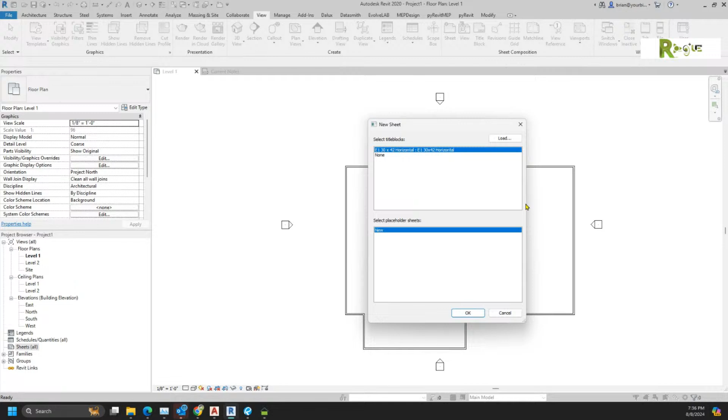And the neat thing about it, we can have different paper sizes, but I'm actually going to want to teach you how to make a border, because you have to know how to make a border. It's this very simple family. That's something that we're going to get into real quick on this step 2. I think I wrote in the email that at the end of September we're going to be going into a step 2. The idea is that level 1 that I just drew of that building, then the roof and the site plan, at an 1/8 inch scale, we're going to find it just fits on the sheet.

However, if we've got to do that at a 1/4 inch scale, which typically for coordination drawings is exactly what you have to do, you see it just barely fits on that border. Now, we would find out that it's got this little title bar that comes in with it, and you'll notice that this level 1 corresponds to the name here, which means, once again, if I name it here, now it gives you this question.

Eric, you want to speak to that? Anybody want to tell her what that's saying to you? There's going to be several times where Revit's going to ask you a question. What I don't want you to be is so scared to answer incorrectly that you don't move forward beyond that point, because in the early days, that's where you'll get. Try to read it, and what it's saying is it's going to rename the levels. Okay? So that means it's also probably going to rename the ceiling plan as well.

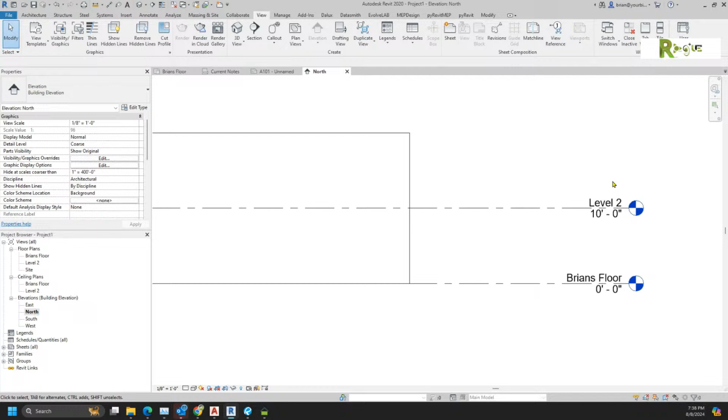Let's see if that's the case. We say yes, and you'll see now I have a Brian's floor plan and a Brian's floor ceiling plan. But what it was actually telling me was now I have a level line that's named Brian's floor. Okay, so that's what that question was asking. Now, typically, we're going to get these levels all in correctly, and we don't want to do that. But what I was trying to show you is it also fixed the name of that view. So now I've got a drawing, and at that scale, everything works good.

Now, what Eric was worried about was the dependent view. So when you start getting something that's large, like the size of the casino, when we get a building like that and we go back to that sheet, now we're stuck with a predicament. How do we get that to fit on that sheet? We got to have a match line. You've seen drawings enough. Are you familiar with match lines? Which basically means I'm going to have an east wing and a west wing, or area A, area B. There's lots of different ways that you can do it.

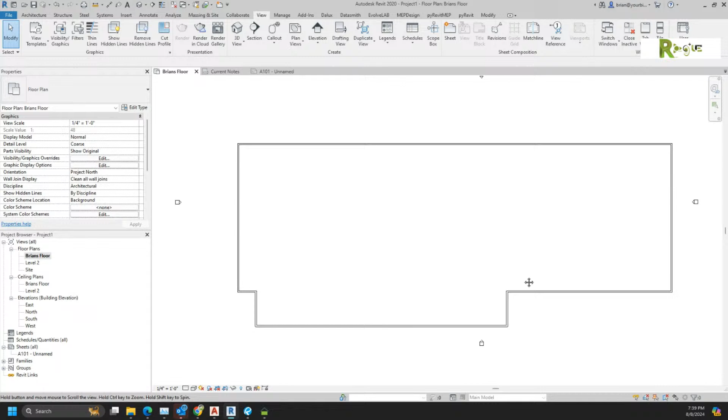But what your objective is, and it's a little bit tricky, because right now, down here my cropping is not set to be on. This one here says crop view, and this one here says show crop region. So I can't even see it, but there is actually a crop region there. Actually, there's not, but let's pretend there is. And that's the crop region. So I don't have a big enough piece of paper to fit this thing on. So that's where the dependent views come in. So this is where we duplicate as a dependent.

You're really going to get this driven home when we give you a model and we tell you we need to set this up. So now you'll see that even though Brian's floor looks identical to Brian's floor dependent one, what I typically do, what I've learned, and just to show Eric, is I found that now if I put Brian's dependent on here, I can pull in this view.

Now I double clicked in that view to activate it. See, I could pull all these things nice and tight, these elevation markers. If they're not that tight, they're not going to show on the drawing or on the sheet. So that's why I'm bringing them in closer.

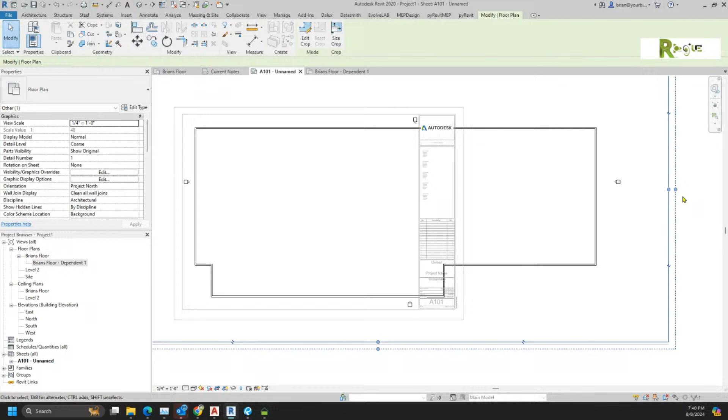But the real thing I'm trying to do here is this crop boundary. You'll notice it looks a little different when you highlight it. There's actually two lines. The second one is an annotation. If you don't like that, it's right down here, called annotation crop. You can turn that off. You'll probably end up keeping it on because it's important.

That way the tags go on the right view. But what we can do is pull that crop boundary down to where the building is. I could take my view title, drag it up into place, and you're going to get to do all these clicks and drags because I don't want to see things. I want to see things as PDFs.

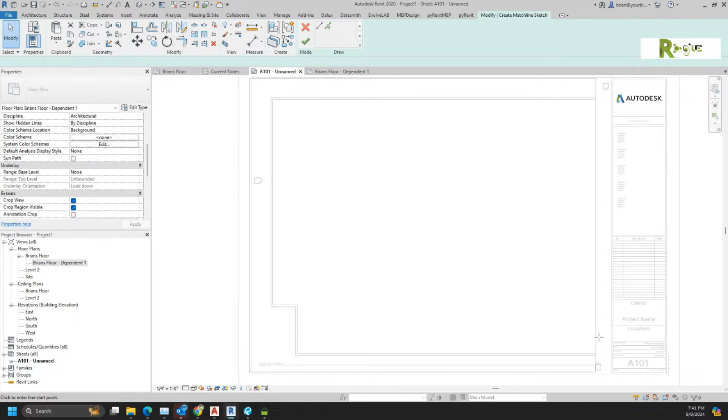Now we can make that a little bit better, because one of the things that happens with a dependent view is the dependent view works very good with a match line. And then as well, we're going to show you another one that's going to be called a reference view.

So what happens now is if I go back to Brian's floor, do you see how this crop boundary is here? That's the area I just drew. The match line is in here. So what happens is I can work on this floor plan. This other crop boundary out here, that's actually never used.

Because what we do is we don't place this big one on the sheet. What we're trying to do is create these guys. So the next step I typically do is duplicate that dependent as a dependent. Now you would think that would be making a grandfather, a mother, and a child, but what it actually does is just create another child of that parent view.

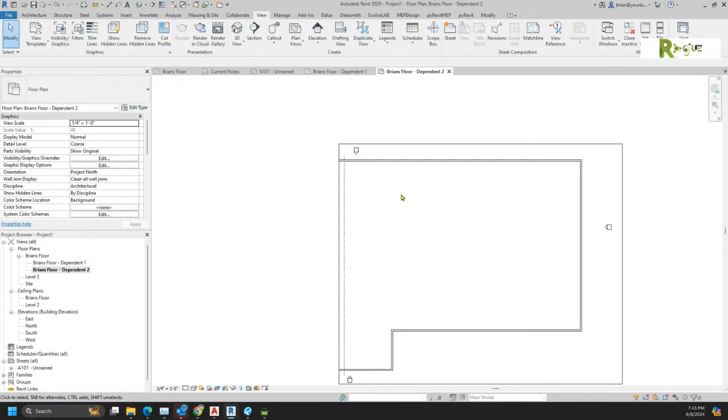So now what you'd find is if I took that crop boundary and moved it over - and I don't want to move it beyond that match line. You see that match line? I want that match line to appear in both views. And the question is, does that fit on two sheets? Sure enough, it does.

So what happens is now my first floor, we would end up taking that original view out. We'd put the Brian dependent one. You'll see how it almost comes close to fitting on the sheet. And what we'd want to do is name this guy. This time you're going to see that where I'm going to name it, it's actually a little bit easier for me.

So I'll go here and say east - or I'm sorry, this would be the west side. And if you sit there and say, well, I don't know, should I make it east or west? My recommendation: go into this view, look at what this is named. This guy is actually named - where's he named? Right there, west. View name west, okay?

So the idea is some people will try to fight it, they'll say, oh, well, that's not how we do it, we think of that as the east. And you don't want to fight what Revit does.

So part of what I'm trying not to fight is, do you see how things are spelled? How when Revit creates level, it creates it as a capital L, e-v-e-l. And you'll end up finding that's the case. So that's where some people say you should do it in all caps. Some people get lazy and let it all go undercase. But my recommendation is you should really get used to spelling things in what I call title case - capitalize the first letter and the rest of the letters are lowercase.

But like I said, that's only because I learned why fight what Revit does naturally. Notice how when it created this sheet, it created it as unnamed. Now, what we've just done is we've just named that guy West.

And normally what I do - now granted, most architects, people, engineers, they'd want you to put something like floor plan or level or something like that - but notice how that renamed it over here. So what I would then do is I normally take that view name, and if it's the only view on the sheet, I'm going to come over here to the sheet name and paste that in, and it would be the same.

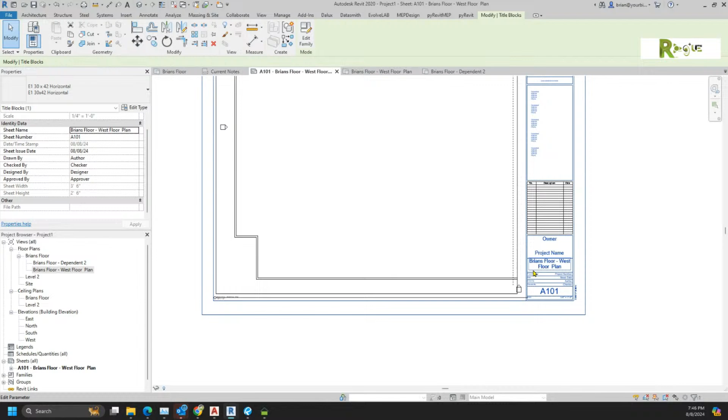Whatever that main view is and what the floor plan is. Now, as Eric and I were talking, it's really a challenge because you don't need to just learn Revit, you need to learn drawing standards.

So can anyone tell me why it's a bad idea for me to take and make my whole view fill this sheet? Eric, you want to help on that one at all? I mean, are you saying because the typical standards are to do 1/8 inch, 1/4 inch, whatever, and keep it that way? You don't want to use 3/32nds? Is that what you're saying?

No, what I'm saying is we should really have a strip here. Oh yeah, here. You got general notes, keynotes, all kinds of stuff. Legend, yes, that's exactly right. We should keep an area where we can put the legend and the key plan and the symbols and maybe a schedule. You want to leave a little bit of room.

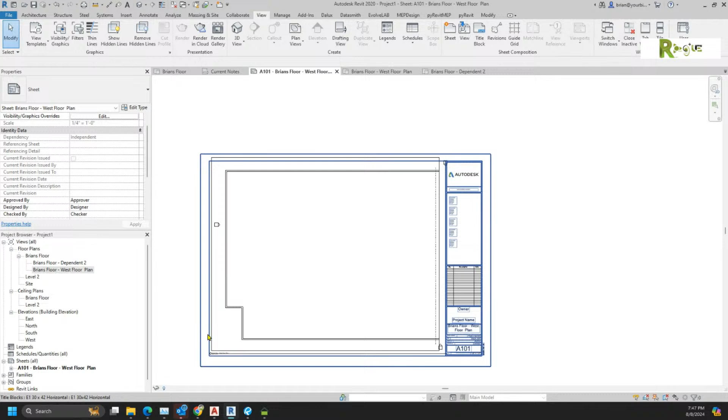It's a common mistake. That's also not a great title block, I don't think. Without a doubt. But with what we cover today, Ginger's going to have her a professional title block tomorrow. Okay? Because it's only going to take that long. Because that's where I wanted to show you. Let me finish the sheet up.

So the next thing I would do, now here's the neat part. If I come in here and I name this A101, and this is where it works better if it's area A as opposed to east and west. See, if I was to say, oh, you know what would have been better? Instead of west floor plan, I would say area A plan.

Now, if I did that, it's really a good idea for me to take that same information, and notice this time I'm going to put it over here just so I don't have to zoom out. I'm going to be putting it in there, and then I'm going to be putting it in here. Now, somebody tell me why I say it's better to go area A, area B, as opposed to east and west.

Because you're not usually looking at two different things. Oh, you're talking about that coding on the sheet. I got you. That's why. Usually you're looking at more than two segments anyways. Yes. Well, but yes, that helps.

Depending on the building. But the thing I was thinking of is what happens, Ginger, is now we've got one sheet. See it down here? Sheet name, what it is. When I go and make my next sheet, like I said, instead of me going create sheet, I have to create sheet so many times. I've added it to the toolbar up here. I say, okay.

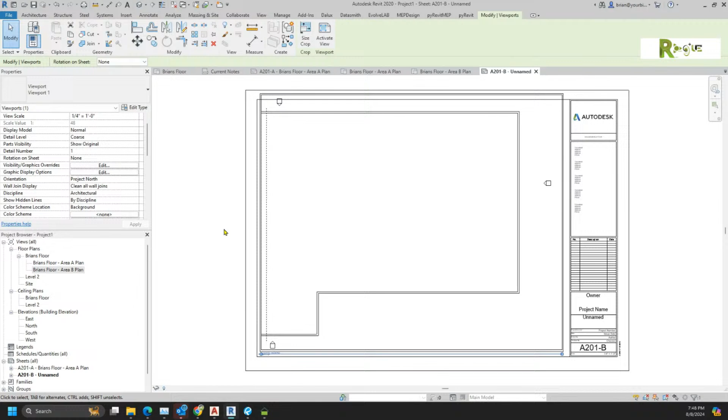Now I drag this guy in. Okay. Notice that he's already named 201B. Okay. And if I name this 201X, watch what's going to happen.

If I say make a new sheet, what do you think is going to happen? It's going to be 201Y. And if I made this sheet 808, what's going to happen when I make a new sheet? It's going to be 809.

And you want to leverage that to make that work, because you see how we got these sheets here? You do understand I created over 1,400 sheets for the project that we're working on. So everything you can do to make this thing go faster is going to be very important. And that's what you're going to do. You're going to try to decide how to break up a project, how to put it on sheets.

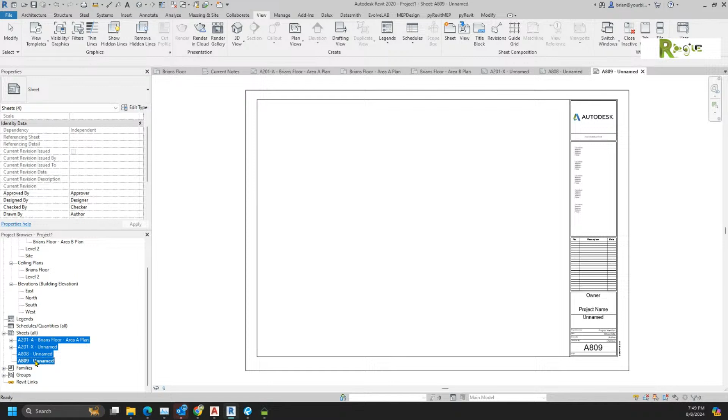And what we were talking about a second ago, I could go back to any one of those floor plans. Oh, I'm sorry. That was it, wasn't it? That's the actual floor plan. This was the one where it was placed on. What we would do is you can double click on the border, or you can say edit family.

Ginger, I need you to unmute and I need you to remind me what the heck you were taught about creating families. What commands should be in this create family? Do you remember the ones you would expect to see? Commands. What do you mean by commands?

Remember, we could do an extrusion, right? What else could we do? Do you remember the names of the ones that we went over when we created that diffuser? We can do it a revolve. We can do a sweep. So my question then quickly becomes, where the hell is extrusions? I don't have those. And the reason being is we taught you how to build a 3D object family.

This type of family is a 2D family. Even people like Mike, even myself, quite frankly, struggle with all the different kinds of families there are.

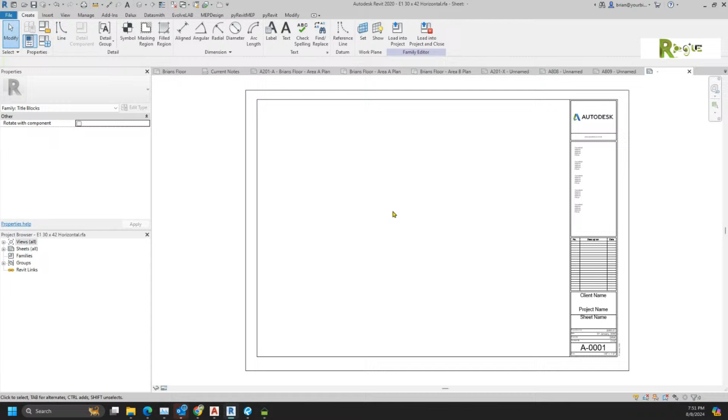What I want you to not be afraid of is a title block family - it's not that complex. It does not have the create extrusions. This is an object where you can only draw lines. You'll notice I can't even put in detail components - I can only do these couple little things. So there's not a lot you can do.

The big thing I want you to realize - Eric was saying you're going to have this a lot smaller so we can make room for the rest of our information. So I usually would be looking at taking about that much information.

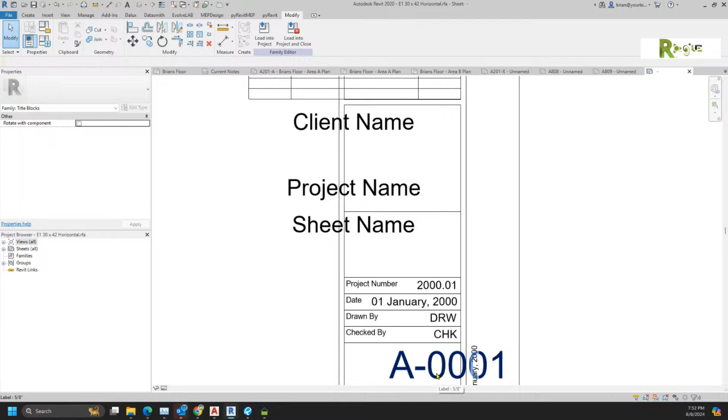And I'm serious, I want you to try to go make a border. Go recreate that border and make it real tight. A lot of times people will turn that on its side, feel free to do that. I just want you to realize that one of the things you get to do on a job, when you're lucky enough to be high enough up that you get to create the borders, you can be creative.

I'm not even going to use this stuff here. I'm going to take this logo, get rid of it. Maybe I decide, wouldn't it be neat if I could create a logo? Well, I could...

Draw myself a shape - and we're going to test you a little bit. Do you remember what I said about these sketch shapes? If I draw another circle inside there, what is that other circle going to do? Create a hole. And if I create another one, it would fill that one in.

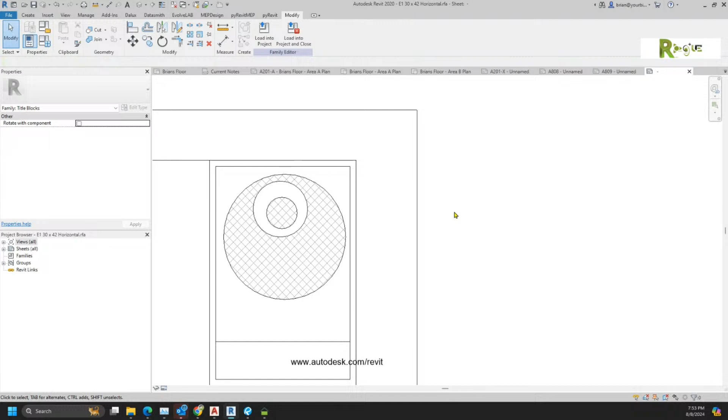So I want you to get a little bit creative. Maybe even go so far as this - if I can draw one filled region, couldn't I draw two and have a nice triangle? And maybe that triangle - I say oh, I only got one type of filled region - well, maybe I'll just create a new one.

Watch where I'm going here. I might say something like gray. And then I could take this guy and make him be a solid pattern of a gray color. And that's it.

I'd like you to be a little bit creative with it. What I want you to understand is the only thing that's typically in the border is a little bit of text. And with this text, we don't like the size of it, so the way most people would have you do it is, oh look, they got a smaller, they got a 3/16 - so I could actually just take all these guys and make them go to a 3/16.

Now do you see this box right here? That box is where it's going to wrap. So what I want to do is actually move all this stuff over so it's about centered in there. And when I want to pick each one of these guys, I want them to go so that they're just inside that box.

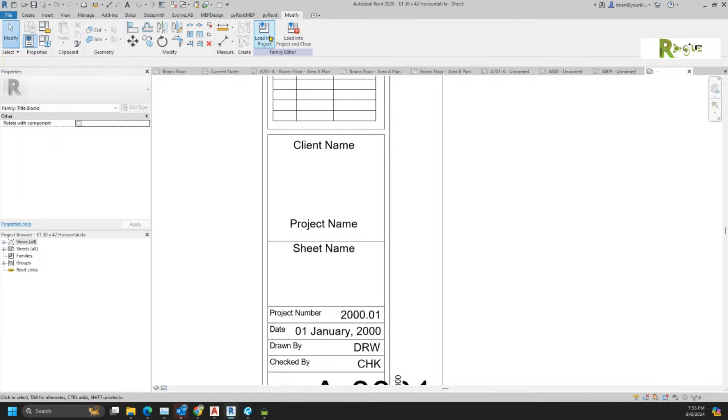And then what will happen when I load this back into the project, you'll see my border got much smaller. My names - remember that name right there where it says unnamed? That actually comes from here.

Control C, Control V. Well, notice I've got a problem - I didn't do anything about my sheet name. So if I go back to... that's always a lovely one. I think you closed it. No, I didn't - it's just a little dash, and there were too many of those across the top to see it. But good call.

Let's see, this one - why does it not have the box? It's a label. It's pretty weird, isn't it? I bet I know why. No, that isn't the why.

All right, these things that we're changing right now, Ginger, they're one of the two objects that you got to draw. You can put in text - whatever I write in here, like 'do not scale drawing' - that would be on every sheet. That's a piece of text.

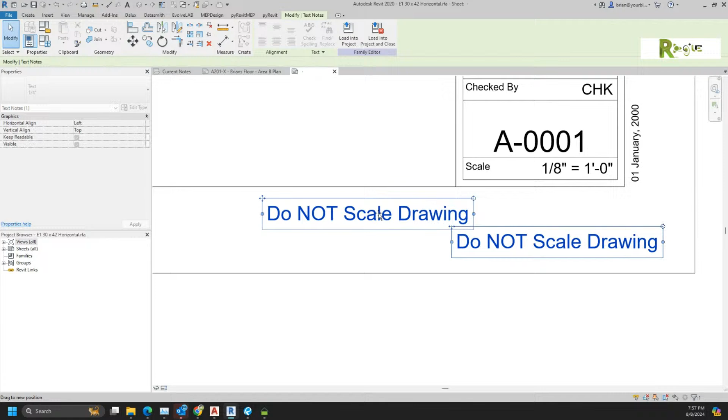As opposed to the other thing you can put in, which is a label, which we played with a little bit when we were making annotation tags. I'm not sure if you were there for that class or if you remember any of that - an annotation tag as well is a 2D family, so that's sort of why I wanted to reinforce what we'd already gone over. The other object you can put in is a label.

And a label goes in that you click on the screen, and then this window pops up, and then we can put a parameter in. Okay, so if I wanted to say the sheet number or one of these parameters, I could very easily put that in. Let's do exactly that. We're going to have it say the sheet number. So we have the sheet number twice. You simply put it in.

Now, if you wanted to put a bunch of information in there, you could put multiple parameters, or you could create new parameters. And you're not going to need to do that in the beginning. Now, that new one that I put in, you know why you don't see that box? Here's why. No, right there, I'll bet any money it's because that's transparent. I bet if you made that say opaque. No, son of a gun. This one has it. This one does not.

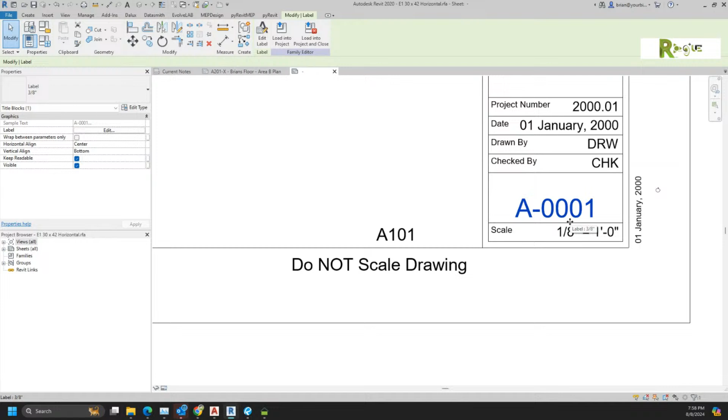This is one of those really weird things about a family. That's because that parameter has probably been around since Revit 1, and there's something a little bit weird about that one parameter, which is interesting. Could it be because of that sample value? No, that wouldn't be it either. I'm going to have to look into that one. I'll get back to you.

But the idea is you can either put in text or you can put in a tag. When we load this into our project, what we're going to see is now we got a good sheet number. And you'll see we were able to put that in there. And remember what we wrote down here. You'll notice when I go to the other sheet, this has an A, but it has the same do not scale drawings. So the only thing you really have to do to create a border is put in labels and text. That's it.

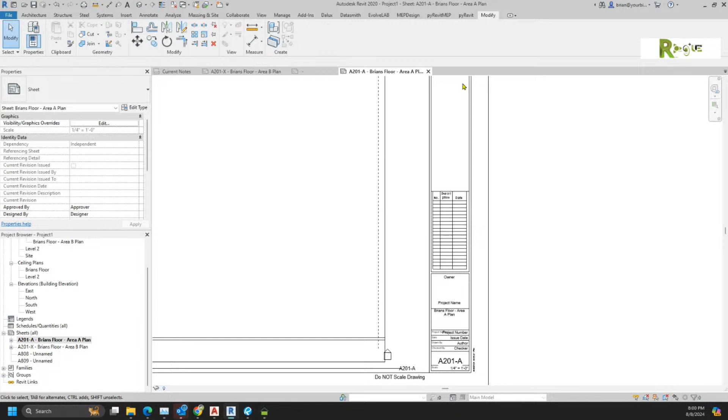It'd probably be a good idea for up here for this logo for you to even play with putting a century one in there. Sometimes they like to have some notes. Blah, blah, blah. Maybe you want the home and office number. Maybe you want the subcontractor. That's what typically goes in a border. You have some borders laying around. You could go check them out. Okay. Well, what we're trying to do is leave ourselves some room so that we can put some text on these sheets right here, some general notes, like we said, key plans, vicinity plans, that kind of thing.

So, dependent views. Input, Eric, Misty, Ginger, anyone? That's pretty much what I wanted to make sure was understood. Well, the way I think that's best to be understood is going to be for Ginger to lay out about a couple hundred sheets. And I guarantee you, when she gets to the last one, and same thing for Tyler, I think if you set somewhere between 50 to 100 sheets up, I think you'll have the hang of it. I'm pretty sure.

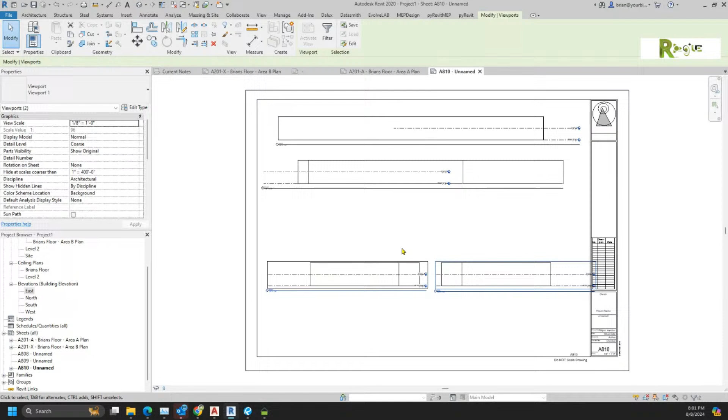Understand, the way we would look at it, Ginger, we would then be looking at setting up the sheets that are going to be the north view, the south view, the west view, and the east view. And see, I would personally probably try to jam both of these on. You notice I do a lot of nudging when I set this stuff up. Maybe I even want to do it at a little bit larger scale. But the idea is

now, since I've got enough experience, what I can then do is realize that I'm going to be putting a roof on this thing. That's why I gave myself a little bit more room. I'm going to go throw some doors and windows in there. I'm also going to be checking these levels out. So one of the things we can do, you're going to notice that I'm actually working in the sheet. So don't just think that we set these sheets up so we can communicate with other people. Actually, if you do a good job setting them up, you can actually do a fair amount of work.

So let's get realistic. There's never a 10-foot floor to floor. If you're building 10-foot floor to floor, that's like on the casino, or on the tower. That means there's no room to do anything. By the time you've got structure, you've got no room. So let's call that maybe 11. Actually, I'm going to go bigger than that. I'm going to go 14'8" because this is a big floor.

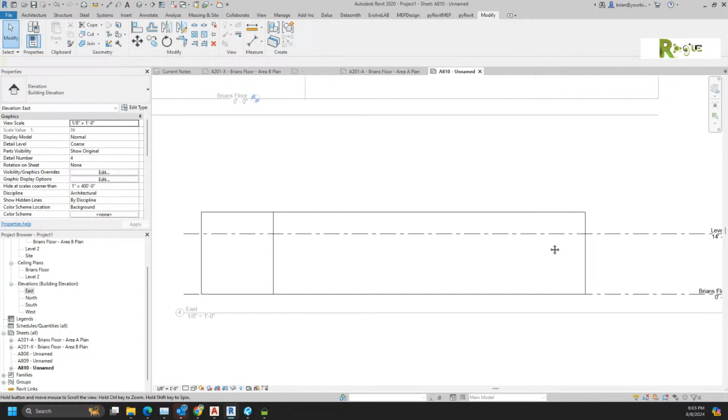Right? Notice how they all went to that 14'8" in all of my views. See, because that's how a level line works. It's affecting all of those. So another thing, if you've never enabled the crop on that view, if you've never turned the crop on, what you would find, can you see that little 3D? That's very important because of what that 3D means. I want to do this so you can see it in both views, which trust me is not going to be easy because I've got to get that little dot.

What you'd find is if you look at the other view over here, notice how it moved itself over. See that one over here? And on this side, I need to actually stretch it out a little bit more. And the reason being, do you see how that fixed it in both views at the same time? Because they were 3D level lines.

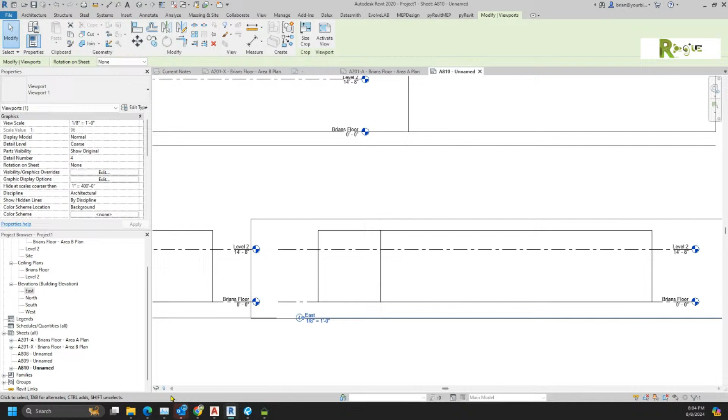Okay, now, what does the other look like? Well, if I was to go into this view and turn this cropping on, if I take this crop boundary and I strike that level line, what you're going to find is now when we pick on this level, it no longer says 3D. Oh, I need to cut just a little bit more. Hey, why would it not be doing that? Because the annotation crop's not on.

You think, Eric? I'm not sure. I'm pretty sure that's it. Now, when you go like this, let's see. I would have thought for sure when I cropped this view, yeah, it's not affecting those. I don't know why that one is. I would have expected that. Another one I've got to do a little bit of research on. The idea is if we turn that to a 2D line, what normally happens is that crop boundary.

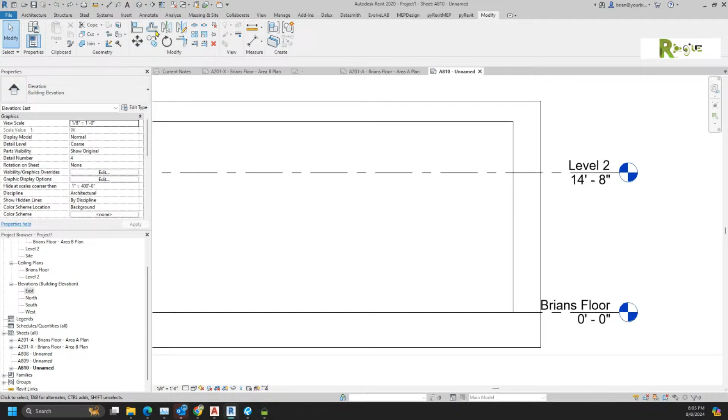Oh, I know why. I'm not too smart. Let's go back to there. Is it 2D or 3D? No, no, levels? Nope. Think about it, because once I started thinking about it, that crop is not enabled. So if we looked at the view, you would actually see it doesn't say crop the view. So I could either click it here, crop the view, or here. When I turn crop the view on, now those grid lines, you see how they now say 2D instead of 3D? I always have that crop on all the time, so I didn't know.

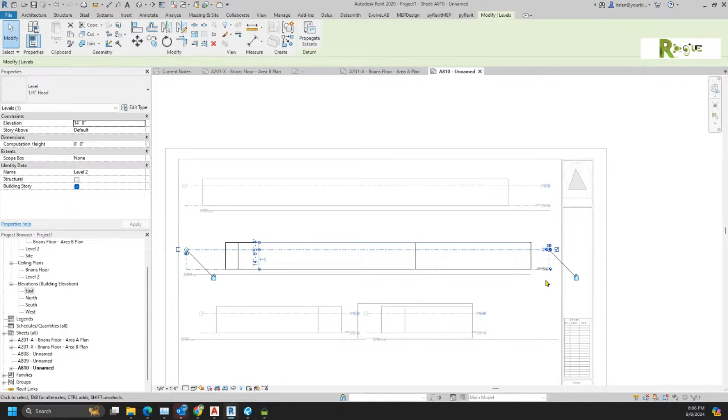But the gist of it is, in this situation here, when we're early in the project, if you're picking that 2D, you're not doing the same thing as this, which is in the 3D. Watch my top view when I get out to here. Do you notice how the level lines came out exactly the same? So when we're first setting up a job, you really want to do that to the 3D tags.

One of the things you can do then, let's say you've already cropped your stuff, but now you want to move that level line a little bit more. What's a good idea is to turn your cropping off, grab the 3D grip, and make that adjustment. You with me? Now it just made it to all sections and all your sheets that are related to that direction.

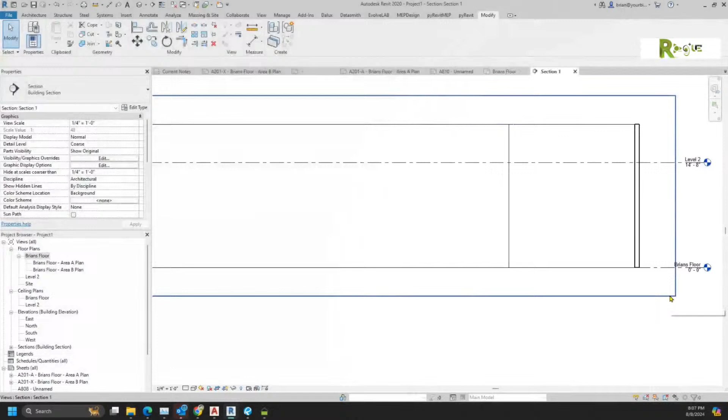And the way that's working, Ginger, if this is all true, what I'm saying is now, if we were to come into Brian's floor plan and draw a section across this building, you would actually see that those level lines should be working pretty doggone good. And if you're using the blue tag and the names on this side, I'll be honest, generally it's a good idea to edit that family right there.

Now, remember when I told you to edit the border family? It wasn't really that big of a challenge because you just picked on the family and said, oh, Brian, I can do that. I can pick on the family and come up here, and where the hell is edit family at? Okay. And that's going to be a real condition. What I'm trying to show you is this is when you have to look to the next deeper, I don't want to say level because it's a level line, but the next deeper place, which is here, edit type.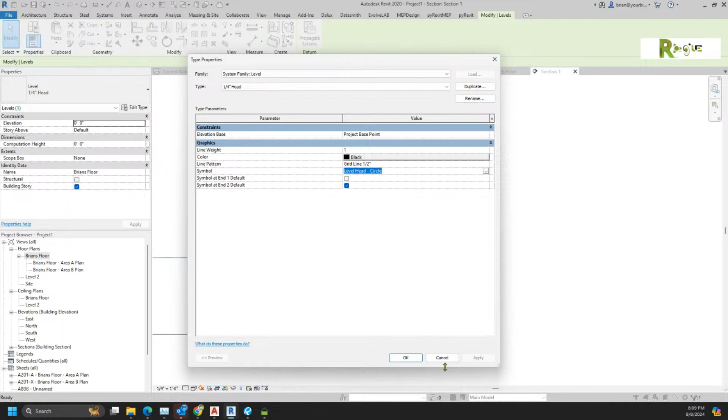Okay. And what happens is we can see this is a 1/4 inch head. And what we're actually doing is a level head named circle. So if I took this information right here, Eric and I and Misty, we already know where to go for it.

But if you were to come over here and say search and paste that in, what you would find is it's gone down all the way to the families, below the views, below the sheets, down to families, opened up annotation symbols, and it says right here's your level head circle. So if I wanted to switch that, I would come to here and say edit.

And now I'm in a family, and this family's a little bit different than a tag, a little bit different than a border, but they're from the same grouping. In other words, it's a 2D. Notice how I can draw the same kinds of things as in the border. Now, what I typically do is I take both of those and I go make them left, and then I nudge those over to the other side.

And then because I'm just really a nitpicky person, whenever I'm working with other people's stuff or from the template file, I always go and change my leader border offset to 1/64th. Okay. And what you're going to see is that annoying big box that's over them, it's going to make it much more reasonable. Okay. Still gives them a little bit of overlap, but before you would find it's very hard to pick.

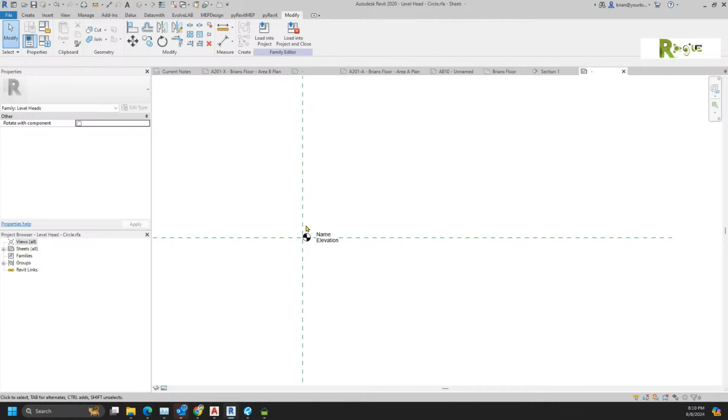Now, I will tell you, when you go into these families, it's a really good idea to do a VV, come to the annotation, and turn your reference planes on. Okay? Because otherwise, it's hard to understand where it's putting that information in from. This is where it's coming in from. So if I now load this into the project, you would see that now Brians Floor would be on the other side.

And then what a person typically says to me is, well, Brian, can't you draw a line out there? And I can. I don't think you're going to have any other line types, so I'll just let it be that one line type. So I'm not going too deep into this. Now, see how it's sort of getting hidden by the names? And that's what I want you to understand.

This is where Revit comes in. Notice how quickly I just keep revising what I want till I get it to where I want it to be. And what I'm having here as a problem is this thing called opaque. When I set that to transparent,

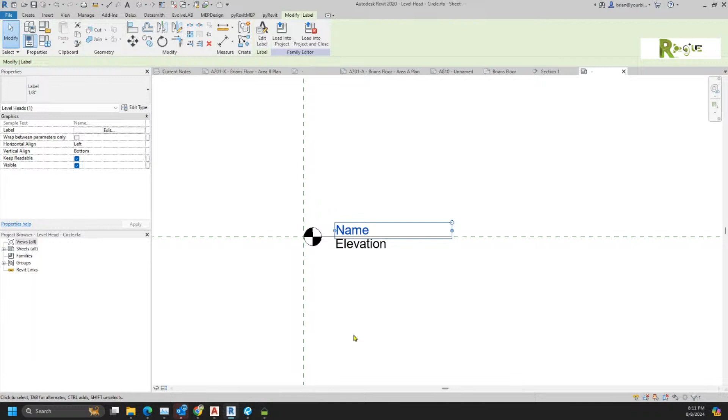And as Eric told you, in some companies, sort of like your company, they say, oh, Ginger's not smart enough to make those families. We're not even going to let her do that stuff. That's not the way I think. Okay. My recommendation is you should be able to do everything, but depending where you work, at Eric's company, they were divided into 3 different groups. One of them was the ones who did the families. One did probably sheets and text. Dimensioning, just dimensioning. Who did the sheets? It was sheets were dimensioning and annotation, and then there was a family creation team, and then there were the modelers, which did the coordination.

And trust me, if you had to spend 1 month or 2 or a year doing just sheets and annotation, you wouldn't make it. It sucks the life out of you. I would imagine it would.

So now what happens is I'd really just be working in here. This is like trying to take those fundamental skills that I gave you and just sort of amp them up. So I'm going to go ahead and close all other views. I'm going to close these families. That was the border that I played with. This is the level line head. I could now go back to drawing my building, which most people wouldn't think. Now I'll show you why there's a little bit of a backward step here.

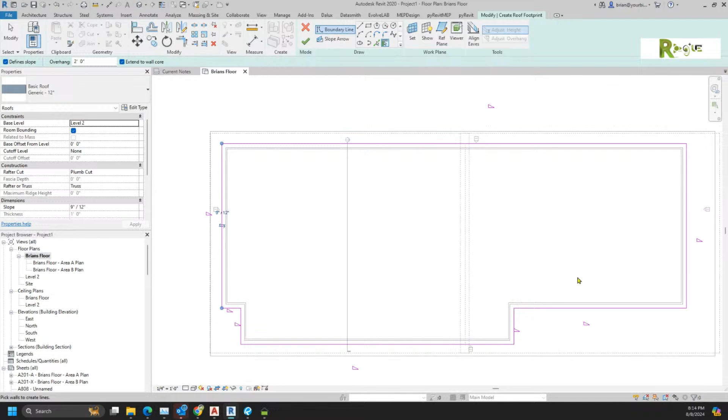So maybe the next thing that I'm going to do is put in a roof, and I'm going to go ahead and say define slope. I'm going to put a 2-foot overhang on it from the core. I'm going to highlight over top. Do you see how it's picking that one line? You got to start playing with tab. So I tab, and it's going to put that whole roof in. And now I could finish.

And what you would see is if I went down to my elevations, I put my elevations on one of these. Oh, I did. Right there it is. So I could take these 2 views and delete them. I could go to this view, and you see why I was trying to give myself a little more space, right?

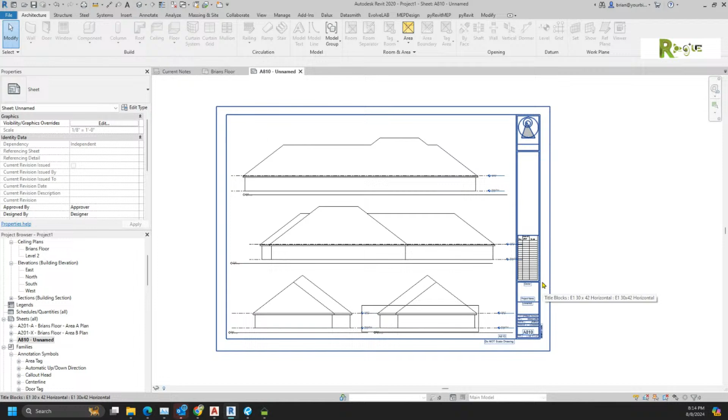That was why I was trying to give myself a little more space, because I knew I was going to come back and put this hip roof in here. Okay. So you see how now at the same time I'm modeling, I was actually setting up my sheets. So if I go back here, I could now

let's say I wanted to place a bunch of windows, but instead of doing it the way you would think, instead of drawing a wall, I'm going to come down here and do this storefront, and I'm going to say that this thing is going to be about 12 feet tall, and it's going to go right across here from there to there. And maybe we'll put a little bit down here in the corner. We'll get a little bit neat here. We're going to take that 6 foot,

and then we're going to just go like this and say copy. And remember to look for the speedometer area. This area right here. See, one of the ones that's sometimes good is if I said multiple, I could just go way up here and type in 10, enter, 10, enter, 10, enter, 10, enter. Right?

And maybe we got a little bit more. Notice that when I go back to drawing a wall, it's going to remember what I was drawing. Okay, so it didn't go back to that other type of wall. It stayed at the storefront. And then you might put in a couple doors.

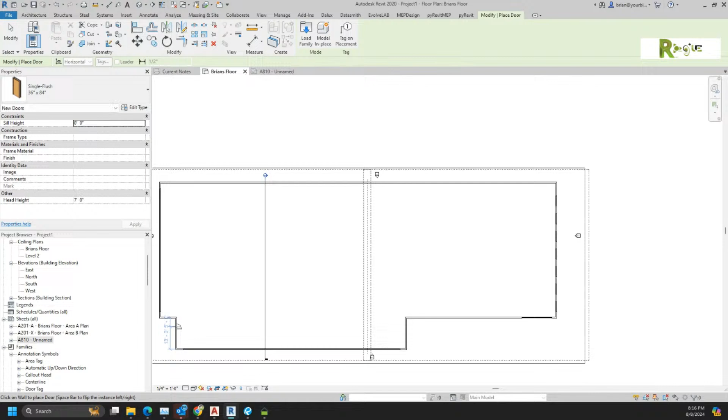Now let's go back and look at that elevations, which I should have named. Notice how all that information's been put in there. And by you naming it, then you see it names the elevations over here. Okay.

Now, what else might you do? You typically wouldn't do this, but I could actually hover over this wall, hit tab, pick all those exterior walls, and turn them to this brick on CMU and watch what happens. We just put brick. Okay. Now, this is a typical. Remember, I came from a standard template, or your early days, you're not going to be able to make these look a heck of a lot better real quick.

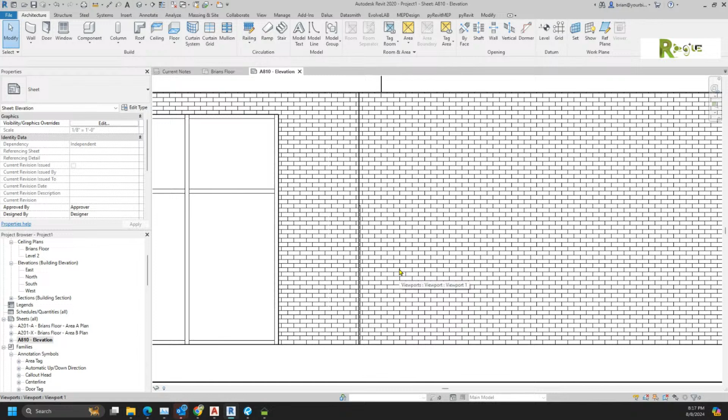But one of the things I would probably do is I would say, you know what? Those walls, I think, notice how I went here to the brick? If I just simply went to that material of brick, wasn't scared of it, and said, you know what, I'd rather that be a gray color. Now you can start to get some depth. You can start to feel that building. But even at that, it's very dry. It's still very bleh. So what we might do is we might play with other things.

Typically, I do most of my work in fine. I do sometimes play with these a little bit, but I would typically have most of my views set up to be fine. But we could make this shaded. And maybe for an early phase, when you're trying to show it to the people you're drawing that house for, that might help you out. Okay, they're giving you that color.

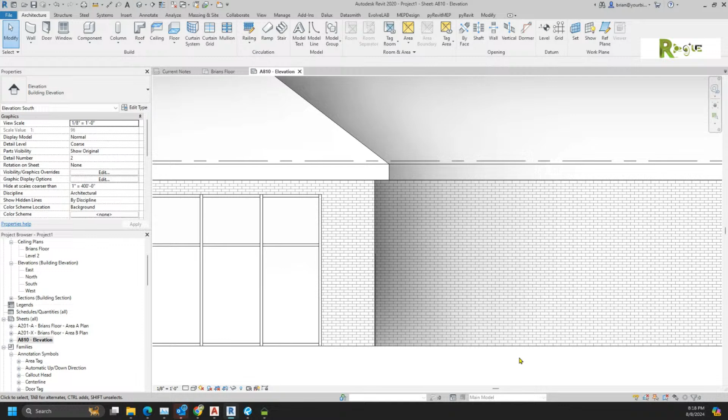But either with the color or without the color, I will tell you that if you go underneath here and you go to graphic display options, there are two shadows. There's cast shadows and ambient shadows. And I want to look at the ambient shadows. What you're going to see is very little effect when you're far out, but can you see how this front face kicks out? I can actually see the building kicking out.

Don't get me wrong. I'd love for you as well to be saying, well, what does it look like with this? Cast shadows. And those are harder shadows. And those shadows are determined by the sun. Okay? So what I always tell everyone, if you're going to do it by the sun, notice that right next to where I'm turning shadows on, and it's a good thing for you to play with these because there's other things that we'll look at in a second. Okay, I don't typically use most of the other ones, but I don't want you to not play with them.

The other thing I tell people is if you go to the sun settings and you do a still, nope, you do a lighting. What I typically do is I typically take this guy and I duplicate it. And I call this my elevations.

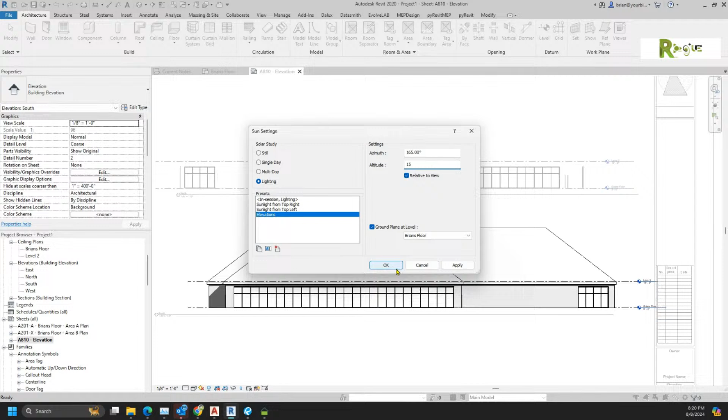Okay. And what I want to do is I want that sun to be very low in the sky and right behind me. Okay. So directly behind me would be 180. So I might say something like 165. High in the sky would be 90. Nighttime would be 0. So if I take that down to about 15 degrees, what it's going to do is put that sun right behind my back in the view.

And you'll notice it casts a shadow going this way. Okay. That can then be used, honestly, on all of your views. So in this view, if we use that same shadows, we were casting shadows, and we've got to make sure that the lighting says elevations. Now we get this shadowed effect. Okay.

Now, typically for mechanical, most people aren't going to use that stuff. Turning on the shadows and things like that, that's typically more for the architect. But I will tell you, it does have a good effect. The last thing that I typically do with my shadows is I don't like them to be as hard as they are. Oops, I did the wrong one.

If I go here to graphic display for that view, you notice underneath lighting, see here where it says shadows? I generally dial that back to barely under 20. Now you'll see that you just have this little bit of a gray. We can see that there's a step in the building. And in this case, maybe.

So what we end up doing now is we decide, boy, Brian, that's really a pain in the butt, because now I've got to go make all those changes on this one, and I didn't turn the shadows on this one. What you do is we look at the name of this guy as East. Right here he is, East. And we simply say, create template from view. And I would call this my elevations. And it's probably going to tell me there's one in there already. Nope, it didn't. Hold on, let me pull it over for you.

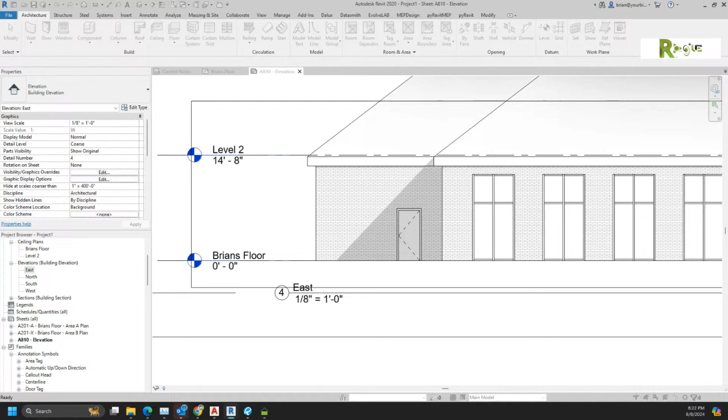And what it's going to do is it's going to copy all of these effects. So sometimes you do want to include the level, sometimes you don't. I will tell you, as you get better, you're only going to try to apply the things that you want to apply. Okay. But for right now, I'm just going to let that be. And when we zoom out, first of all, things I want you to look at. You see how this is dark? And you see how this one has no shadows?

Now, if I take all these views and I said apply view template, there would be my elevations, and all the views would then go with that gray. And as well, part of the problem I have here is I don't have very much break in that face. So what I'd probably do with that building is I'll go in here and say back here we're going to have 4 little notches cut in the building.

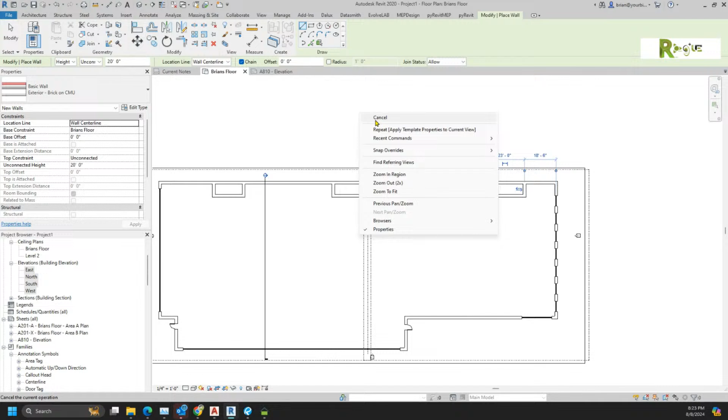Okay. You wouldn't think this, but if I go in here to the modify, you know what? We talked about most of the modify. We better cover the modify tonight. We will cover the modify with this last half hour. You can't really modify anything until you guys start drawing some stuff.

But what you would see is if I come in here to the split element, this is one that took me a long time to do. If I do this checkbox on delete inner segment, I can go pick, and it just removed that segment in between. Eric and Misty would probably tell you they may not still do that delete inner segment.

I just did it last week. Oh, did you? A couple days ago. Yep, I had to do stuff like that, and I did it. I use it all the time.

Awesome. So here I'd probably need a couple doors. And I'm looking for some kind of double sliding. Now what we see is if we go back to those elevations, you see how those shadows are popping and letting you know what's actually going on?

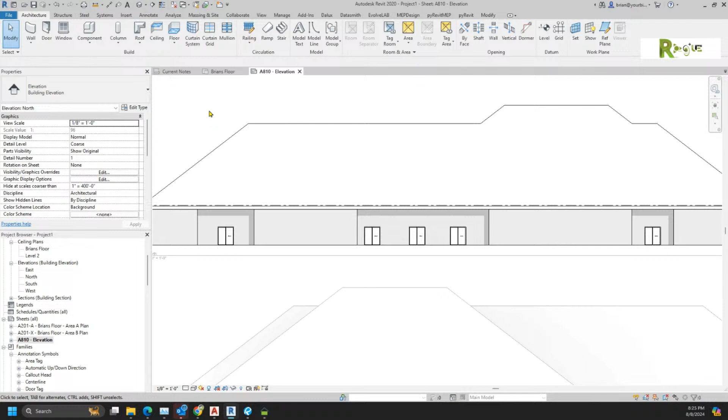Here we'd see these walls that I drew, they were going up too high, right? So if you needed to know how high you wanted it to go, maybe you'd realize these all say unconnected. Maybe I'd take all of those and make their tops go to level 2. Now they all just went away. So you can see, it really doesn't take that long to draw something, Ginger.

Maybe this roof, what I want you to do, and this is what they don't typically teach you, I want you to play.

That's why I always hit save before I hit material. I told you that's because they got that asset manager for crossing the two screens. What version of the software are you using? 22, but it happens in all my softwares. It seems like all versions. No, you got to go load the 22 and then load the patch. Oh okay, really? Okay, I remember them having a problem with that. Go get the patch off of the Autodesk website.

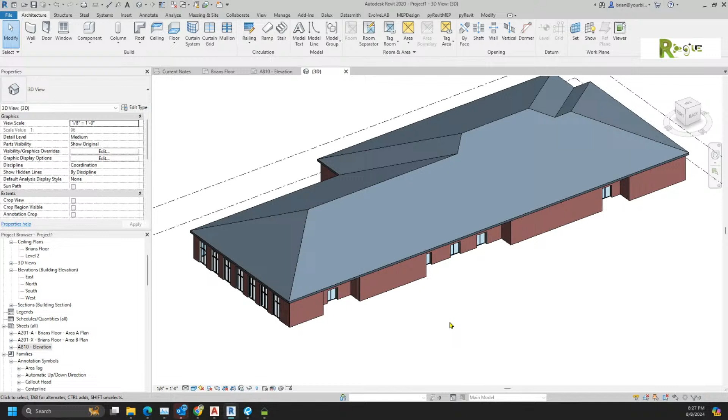Okay, now Ginger, one of the things I was pushing in that last one that you weren't in, or no, you were there, is that the real power comes in the ability to put this brick on here. So if I was able to put, let's say this was going to be a standing seam roof. See how this roof only has one object? Well, I might just, oh, you know what, I'm going to insert.

Sort of funny how they don't say top and bottom, where they do say interior and exterior. I guess they just assume it. I'm going to do that step that I did before. I hate to do it every time, but I'm going to duplicate. I'd call this standing seam.

And what do I do now? I always take that and copy that. And actually, a better name would be roof standing seam. And then what I do is I check this box on. I say appearance, I always got to hit this thing here, and I duplicate.

And notice how, because of this template, it's actually named generic 10. And then I say, you know what I've always wanted is a nice hunter green standing seam roof, which you'll see that made it green. But then on top of it, I put a surface pattern in.

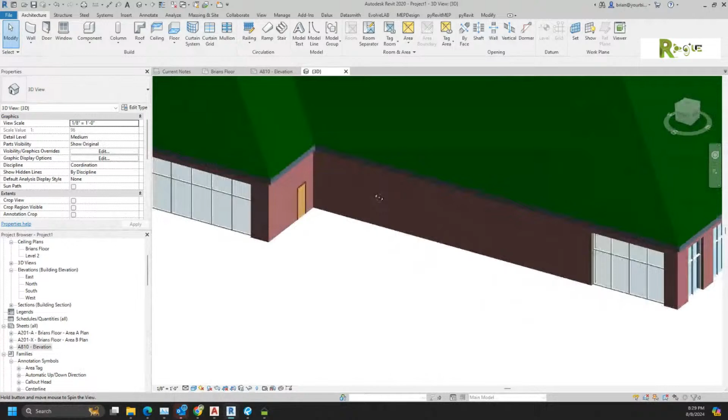What we would find is, if we went back to what we did last week, which was the managed materials, you'll notice I'm already on that roof standing seam. This is the culprit, and the problem is it needs to be a model hatch, at which case I would make a new one. Guess what? Control V, oh cool, I already have that.

And we would say the spacing is 2 foot with a 90 degree. If it ain't 90, it's going to be 0. Let's see what happens. And now all of a sudden it looks like a standing seam roof.

Now all of a sudden, I mean Ginger, you have to understand, in CAD, how long would that take you, Eric? How long would that have taken you? I mean, we got quick at it, but it still would have been a half a day's work.

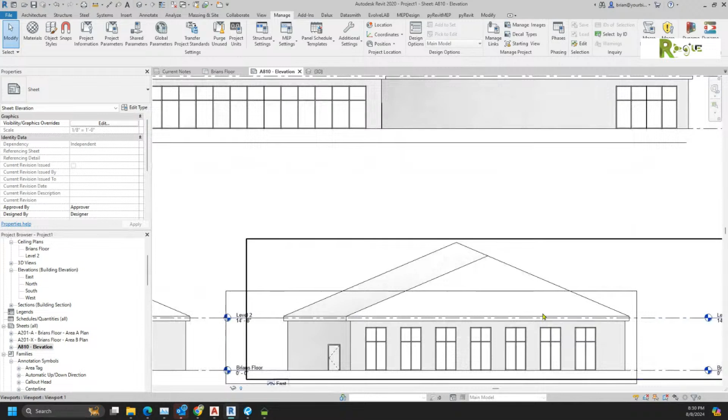Yeah, and especially when we start adding the additional details. And then remember, part of what I'm trying to do is these things here. When you do these for an architect, what generally happens is, I'm just going to pull this graph boundary up a little bit for me. Is what this is missing is nothing more than, all we annotate a material.

Okay, now obviously, because it came from the template, it needs a little bit of work. It needs a leader head put on it. And on top of that, this one didn't come out. Why didn't it come out?

Well, if we pick this guy and we say edit the family, because I do not want you to be afraid of these families, okay? I want you to learn. They're really just a bunch of 2D families, a bunch of 3D families, and then a couple really freaky families, mostly for structural panels and a couple different things.

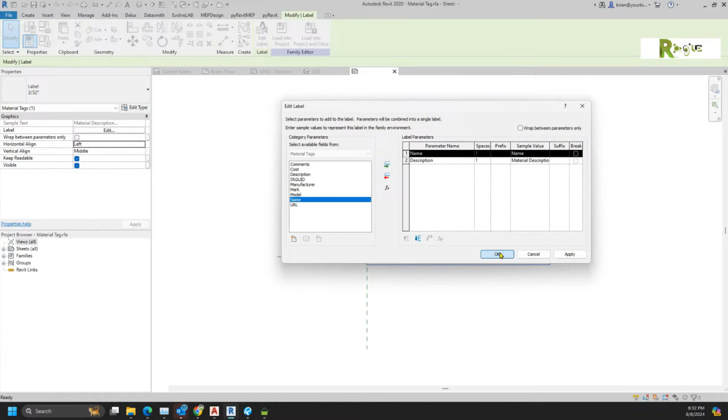You can actually do the name and the description, and let's see what ends up happening. You're going to see this one says roof standing seam, and this one says brick, common brick. That makes sense? And all this is a little bit of annotation.

Let's see if they've actually even given you this one. See what people start thinking is, I think everything is a doggone keynote. But if you are actually using what's in here, right? What happens when I hit this?

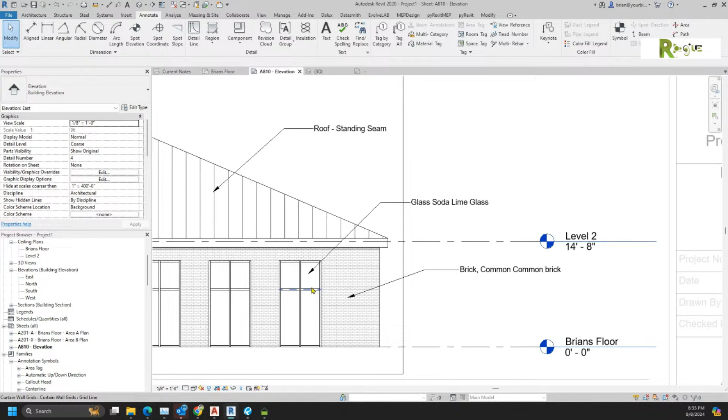I could go put a better material on that for the material name. How would I do that? I'm going to do a couple tabs so I can get that piece of curtain wall. I'm going to go to edit type, and what we're going to see somewhere in here is going to be the material. See where it says material glass? I'm just going to make that say soda lime glass. And I might make something like curtain wall.

Or whatever your architect or engineer calls it. And all of a sudden, instead of you putting in a bunch of text, because you could do that exact same effect, Ginger, by simply going to text, going to this, and now I could do this and this and this and type, right? Where you could say, well, what's the difference? Why is one better than the other?

The reason is because now you could go to any view at any time and go material tag, and you would have all those proper notes, right? See, once you've done it once and fixed it the one time, now you can do all of your sheets, and all of a sudden we can do a working set of drawings.

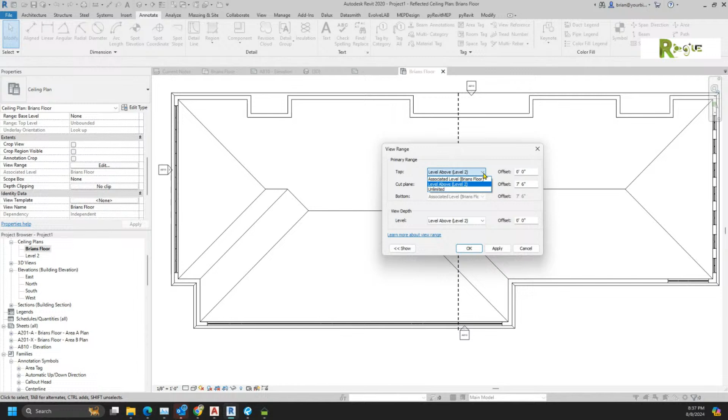So why did that show that roof? That must be because the view range is going all the way up to level 2, as opposed to if I brought that thing down and said maybe minus 4 feet from level 2. That should take that roof away, no?

Why would I be seeing that roof? Got any ideas there? Are you in mechanical view? No, I'm in an architectural view. Did you change your cut plane? No. It's on Brian's floor, it's going up to 7'6".

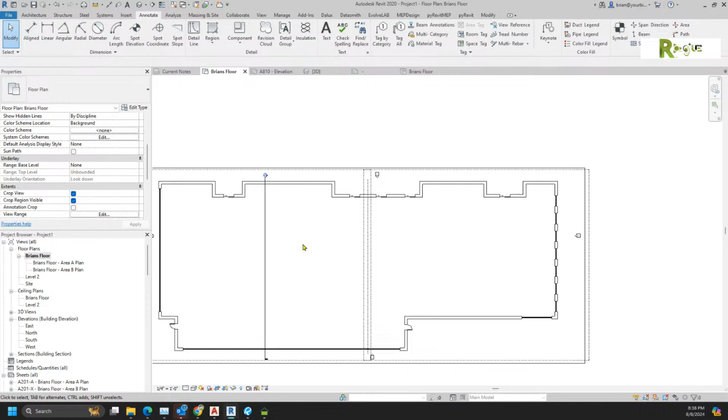Oh, underlay. Why is this? Oh, because I'm in a ceiling plan. Tell me you never did that. I dare you to tell me that's never happened to you. It's happened to all of us, right? I've never worked in a ceiling plan. Oh, you never worked in a ceiling. I hear you. Smart.

So really now, what I wanted to cover was the one that I sort of forgot, and that's what we're going to call a contextual menu. And that should pretty much run us out. We're going to probably maybe even cut out a little bit early.

How hard is it for you to get time in? When do you think you're going to start to get time in, Ginger? When do you predict things are going to slow down a little bit? Because I would imagine before long, you're going to be mobilizing and out of there. I thought things were slowing down, but everybody decides to change their tax forms and all that good stuff. Yeah, so probably still a couple more months.

Now I'm trying to sneak some in and trying to go out and play with the Dalux some. Well, that's good, that's good. That was something that I definitely tasked you for. And like I said, I definitely think that it was cool that you did the augmented reality.

I was thinking about trying to come up there again, who knows, I may just do that. So have take me out in the field. I did a video, I screen recorded it. I did it, but I thought it was too big to send to you. But you could post that up on my drive where you download the files, that Google Drive. You can put it up there. Ah, that would be awesome.

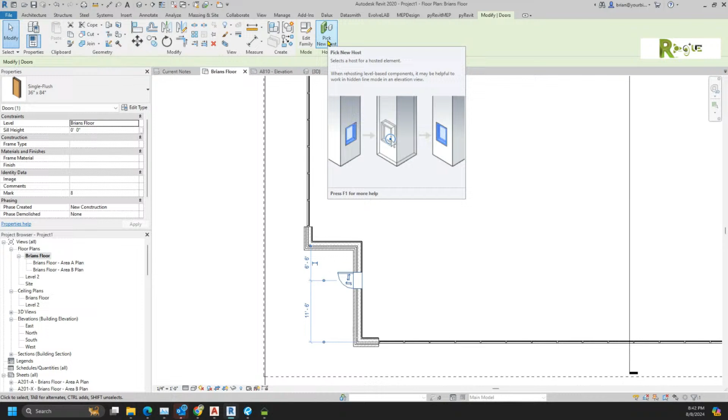Now, most people would say, well Brian, why didn't you just create similar and delete the one you don't want? Wouldn't that be easier than pick new host? Eric, Misty, you know why we want to pick new host? You want to tell everyone why we'd pick new host as opposed to losing dimensions or notes already tagged to those things? Well, the door schedule might already have a door number for the door schedule. Yep, there's that piece of equipment. It's never a good idea to delete the equipment and put another piece of equipment in, because if there's any intelligence in there, in this case this mark number right here, it's better conserved by doing a pick new host.

But what we're after is we got cut to clipboard and copy to clipboard. I'm hoping I don't have to explain the difference between those two for you.

Another thing that it did is this match. So we had another wall, and let's make this wall be just one of these weird ones. Oh, not that weird. How about we just do it generic? We can then go to the match command, match the object, and match the object. And you see what it did? It changed it, and you can do that with tags, you can do that with dimensions, you can do that with all kinds of stuff.

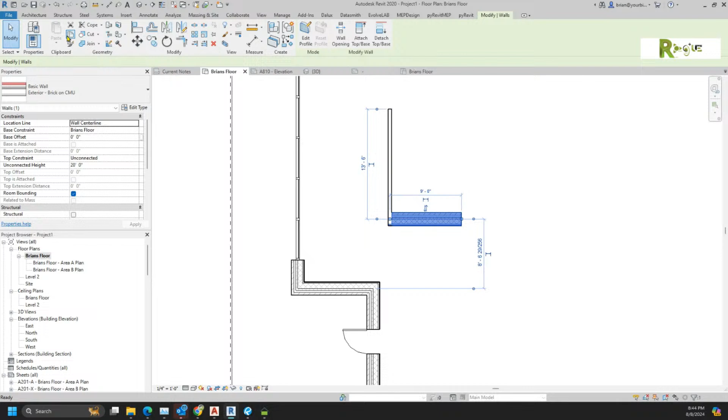So that's the match. The copy and paste, the one that's a little bit weird if you're coming from AutoCAD, when we do a copy, the paste is a little bit weird. You've got paste from clipboard, aligned to a selected level, aligned to the current view. That's typically the one that I use. Aligned to current view, aligned to the same place, and aligned to a picked level.

Okay. Those other ones will eventually show you that if you have a 5-story hotel, you might say, I want this same bathroom on floors 3 through 5. That's what the paste aligned to selected levels is. We would pick which levels. If we had a lot of levels, we could copy it to all those levels.

The coping. The coping is sort of funny that they've left that on there, because now they've added most of that stuff into steel, right? And the structure. Do they have coping? Yep, they have the same coping probably right here. Interesting. We don't need to talk about it a whole lot. There's usually a coping and remove coping. Those were the original commands. Like I said, I think they might have just duplicated that in the other one.

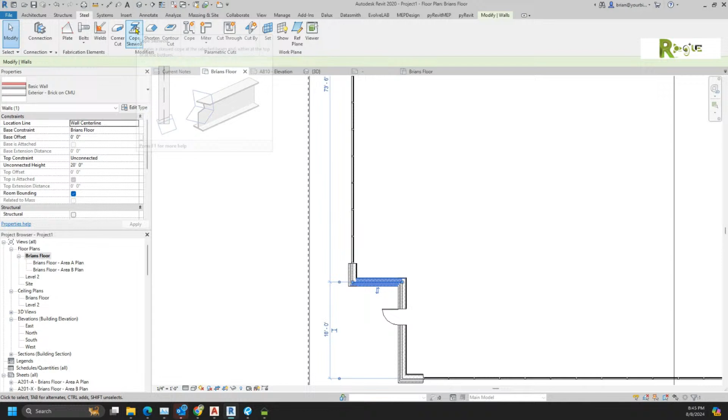But it's funny because they call them both cope, but the image is a little bit different. And how do you remove it? You don't have remove. That cope must be a different one. That is weird. Nope, it is the same. It is the same. All right. So we don't need to get into that.

Now, here's one that's funny. This command is cut to clipboard, and this command is cut. Okay. Now, one of the things that most people don't know that you can do is if I drew one of those goofy walls, and that's not what I wanted. I actually wanted this wall to cut through the other one. You would find I could actually cut this object, then this. No.

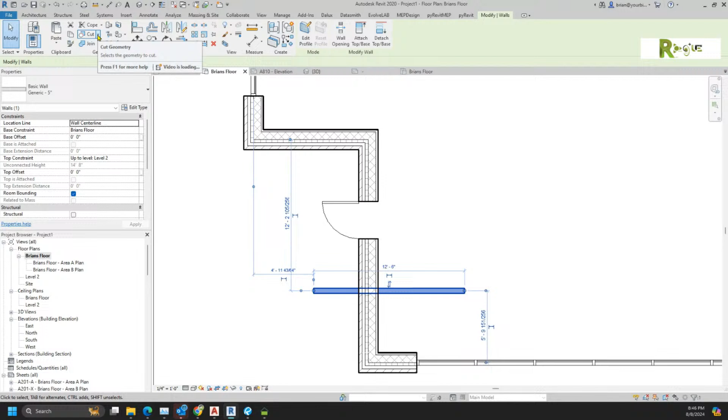You must have to remove that join, I'll bet. You would have to unjoin these two geometries, and then you would have to pick this guy, and you could actually cut. Oh, it's going to prove me a liar. I guess because they're both walls. If I had another object, I could actually use the one object to cut the other object away, but obviously it doesn't work with walls. But the join does work. I don't know that I want to get deep enough to try to explain how it's actually doing all that cutting. We'll save that for a more advanced class.

Let's go through the rest of the modify. Just understand, cut and join. When you start getting those to work, you're really cooking with gas. This one is about beam joins. That's for structure. This one here, roof. Join and unjoin a roof. I am going to show you that one.

Okay, so if I was to go to maybe my site plan where I can see that roof, and I was going to draw myself in another roof, I'd like it for level 2, and I was just going to go like this and say that these two lines here don't define a slope, and finish that and look at that in 3D. See what I did out there is I made this little canopy covered area.

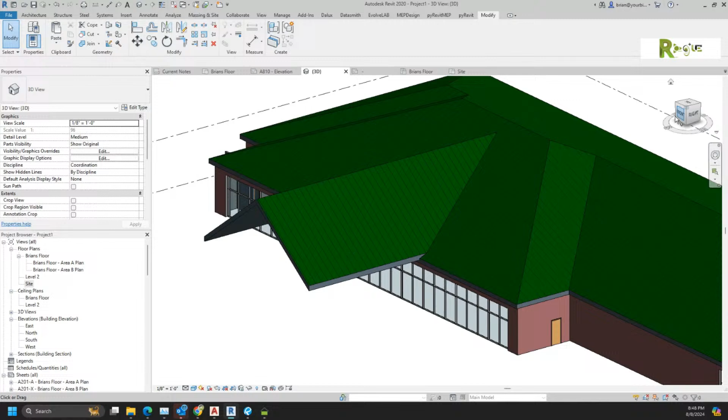Well, the whole reason I was doing that, because if you realize you got that roof join right here, join unjoin roofs, you can pick this back edge and pick this roof, and you see it put that right in there. And then maybe I come in here, maybe I move that up a little bit and put some canopy or some columns underneath it. But you see what it did was it allowed me to make that roof go back and hit that intersection.

And it's sort of funny because if I keep moving it up until it misses that other object, it'll do something you're not expecting, which is where it doesn't hit that roof, it's going back to my original location.

But most people don't realize that about roofs until they're really far in, and we would definitely have a specialty roof class where we got to try to create some real weird roof conditions. For now, just trying to get you through all of this geometry in 15 minutes.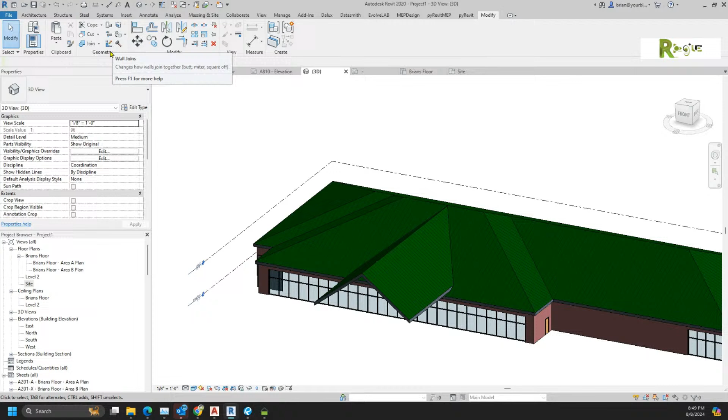This one here, wall joins, what that's really talking about, if I went back to this thing here, what happens is people have a hard time when these two walls join, how they're actually joining. And I'll be honest, I don't think this is normally the answer. Normally what I tell people is, if it's not joining correctly, re-break the wall, right? And try pulling them down in the... see, because that's a perfect example. Those two walls now got themselves joined, which means this is probably going to be weird.

What I tell people is all you got to do is play with the order that you've done that joining in. Okay, see, so now you notice I'm not using that wall join command. All I had to do to fix what I wanted it to do was drag them in different orders. I don't use that one a whole lot.

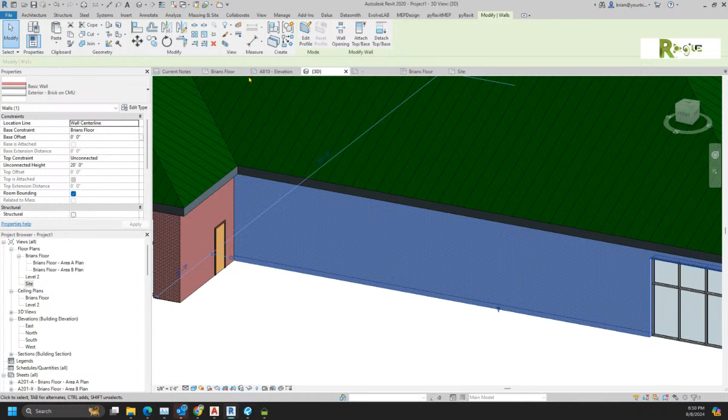This one here is called split face. Let's say we decided that there was going to be a plaque with a concrete. Now, once again, I don't typically recommend the split face and the paint, but it's good to know they exist. Split face, what you end up doing is we pick this face. We're then allowed to draw on that face. And maybe I'm just going to do like this.

And we say finish. And then the split face really works nice with the paint command, in which case I can come back in here. I can hope that there was some concrete somewhere. Let's see, concrete. And I could then paint that area.

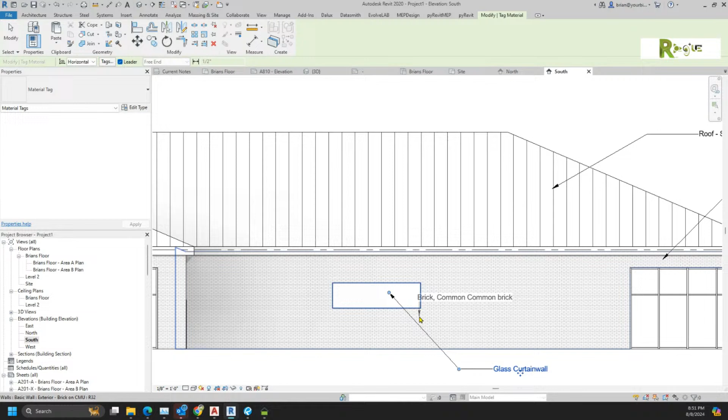Now remember, because of how those things are working, this view, nope, it's the south view. That would all be driven by the material tag. See how it's called glass curtain wall? I must have put the wrong material on that thing. How can that possibly be that way? Not going to worry about it. They must have shared their assets or something. Something weird is going on there. But the idea is you can paint surfaces.

This surface, then that split face, if I pick it, I can actually move that around. Most people don't know that. I could double click on it and I could change it. Maybe I took this and maybe I drew a line, an arc from here to here. Yeah, I definitely painted it with the wrong material. Under modify paint, sure enough, I picked the glass where I was trying to get the concrete. Right?

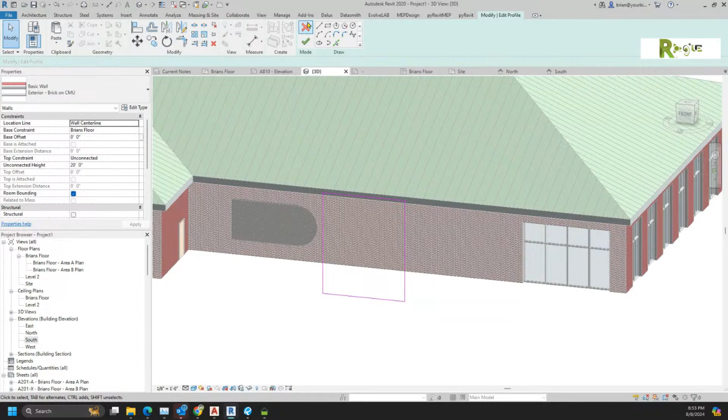While you're doing that, this is a good time for me to go over one that I didn't get on the early rounds. And that is any wall. Let me not double click on it. If you double click, it'll automatically do this, and that is edit profile, which turns it into purple, which you remember the rules about extrusions. If I was to take and do this, it's going to put two holes in that wall.

And if I was to edit that profile and delete this top line, and maybe we do a nice tangent arcs. Now I can create this weird shaped wall like it was a jungle gym or something like that. That's edit profile. If you ever want to go back, you just say reset the profile and you'd go back. That's not actually on the modify. That was a contextual for a wall, but I did want to show you the edit profile.

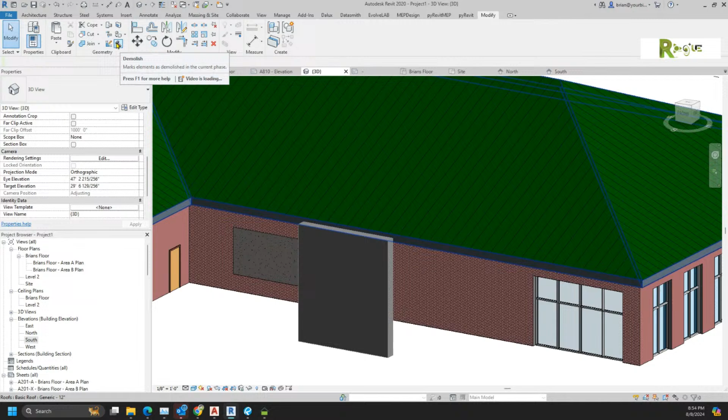All right. So that got us all the way to this one, demolish. This has to do with if this wall was not part of the new construction, but it was part of the existing construction. What that thing here does is as long as I'm in a newer phase, I can demolish it. And what this view is doing is showing me show all, which is showing you the things that have been demoed. So maybe there was a wall in the site that needed to be demoed.

If we change this from show all to show current or show complete, you would see I actually demoed that wall out of the project. That's what demo's for. That's what makes Revit so strong if you're using the existing and new construction phases. Okay.

Don't know that we played with align very much. The align would allow you to do something like maybe I wanted to align this thing with this edge. See how it brought it down there? Then maybe I want to do align the bottom face. Notice I'm going to hit tab and it's going to grab that bottom face, and then that would drag it right down to the bottom. Align, offset.

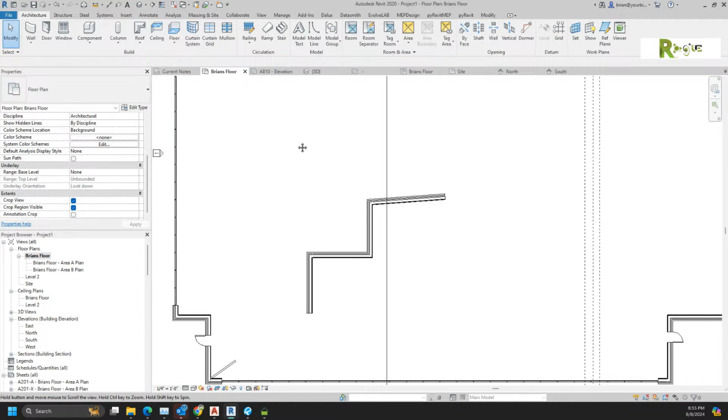Offset, believe it or not, you can actually use on pipes. You can also use it on walls. You can also use it on lines and other things. What I'm after is if I went to offset and I said I wanted to offset that wall, I need a corridor going down there, so it's going to be 3 foot, and I hover till I get that line and then hit tab. Oop, I'm sorry, one click in white space, then hit tab, you would find I could offset all of those walls.

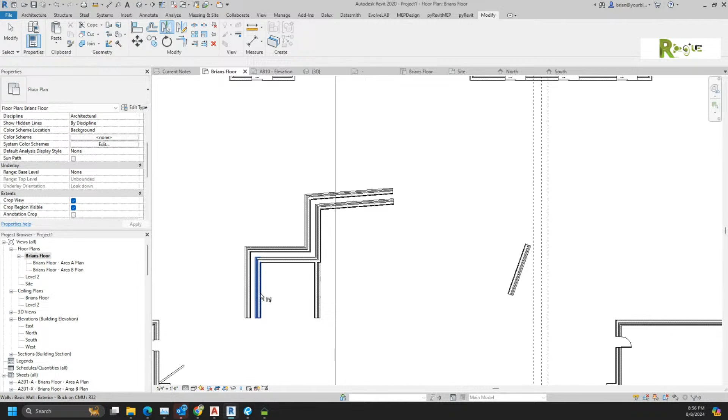Okay, offset. Mirror. Mirror, this one here allows you to draw a line that you're mirroring it around. See, I drew that at a little bit of an angle, didn't mean to. Let's try right here. If it's mirrored around this one, you see now there's 2 walls. And then the other one is the mirror around an object, where we take this guy, mirror him around there. Where did it go? Did I do that? Oh, I pick this guy, I say mirror, and then I mirror it around. The split with a gap.

Move, copy. I think I showed you earlier tonight with copy. And generally what we want to do is we don't want to pick the buttons first. What we want to do is pick the objects that we want to copy, and then we pick the copy command. And you'll notice it remembered that I was doing multiples. So that means if I started doing it, it's going to keep waiting for me to keep doing this until I hit escape. As opposed to if I go to copy and turn that multiple off, now it's just going to be one copy.

Obviously, select a bunch of objects. This one here is delete. This one here trims both lines together. This one here just trims the second line. So some people end up trying to do that instead of using the other command. And then the last one is pick this line and go 1, 2, 3. Okay, that's your extends and your different versions.

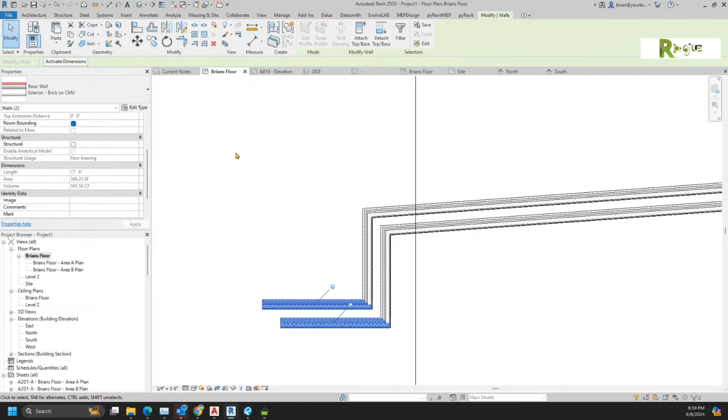We pick these 3 walls and we say delete. We pick these 2 walls, and people like to sometimes pin this stuff. Eric and Misty would tell you I'm not too keen on it. And what you need to remember is you might say, oh, I want to pin this because I don't want anyone to accidentally change it. That's not how the pin command works. So I'm going to show you that, yes, indeed, if it's pinned and I tried to do a delete, it would say you couldn't do that. If I picked both of those objects and I said move, it'd say, nope, you can't move them.

So you would pretty much now say, Brian, it sort of seems like you can't do anything with them. Well, if I work these guys here, I could change them both to generic, and it didn't tell me anything about it being pinned. Oh. Yeah, and the elevation too. Yep, going up and down. Exactly. So pinning doesn't completely lock them down.

This one here is the one where we type in BX, and we actually have played with that a little bit. So that means if I was to click on that, it would show me just that one wall, right? So if I went back and turned my section box off, and I was saying, let's see this curtain wall out here, I could work on just that curtain wall. Now I wonder if that contextual menu will pull up, does not pull up the add grid lines. Remember, underneath architecture, we could add curtain grids, right?

Maybe add like this every other one or every two, so that I get myself a little bit of a pattern. That's how that curtain grid ends up working out with that particular type of curtain wall. And believe me, we will get into curtain walls. That's going to be one of the first things Eric and I tackle, see how we can do framing. So we now covered basically all the way out to here.

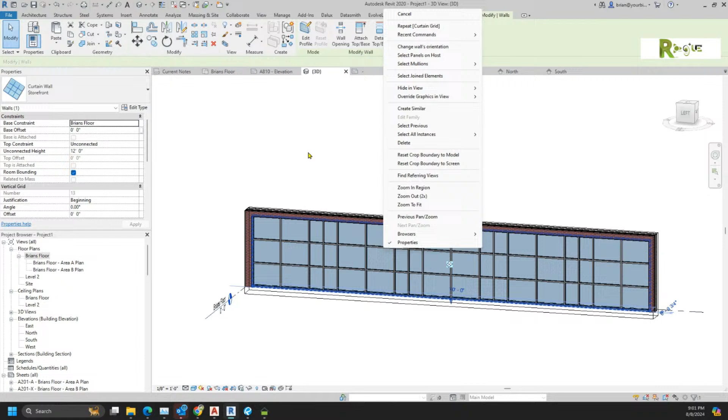I'm not going to get into this displace elements. Make some pretty cool views to sort of show extra detail, but very few people have mastered them. But sometime if you wanted to do something, I'd be glad to help you with it. And then the last one we got is this line work. Ooh, buddy, you ever do the line work? That's nightmare. Yeah.

So let's say the architect tells you, well, I want the roofs to be a little bit bolder on my elevations, right? Let's see, go to these elevations. And they say, oh, but Brian, this line here should be very bold. You can. I don't recommend it. I don't think Eric recommends it. But you could go edit line work and say, this architect wants this line to be heavy and that line to be heavy and that line to be heavy. And you can waste oodles of time. Oh my gosh, they can.

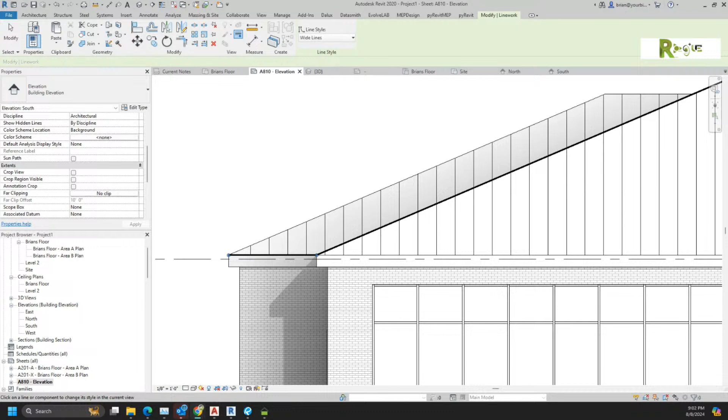Hey, Mikey. Oh, you just got home? Yeah. Well, we'll get that other one tomorrow night. Like I said, I doubt very highly that Cody's going to be in a big rush for it. If he is, it won't take that much time. We're about to wrap up. We covered all these modify commands, and we showed Ginger how to put stuff on sheets. So it's time for her to get started on a job. Nice.

Cool. So we were right here at the edit line work. This one here, I don't ever measure between two references. I just use a dimension. Or really, in all honesty, what I would typically do if I wanted to know how far it was from this wall to that wall, I would go in and say annotate, and I would draw a detail line, snapping at the one, snapping at the other, because that then allows me to pick this and pick that number right there and copy that number. That's the actual distance from there to there. Okay. But I'm sure you could use the measure distance between references, but I typically do this one.

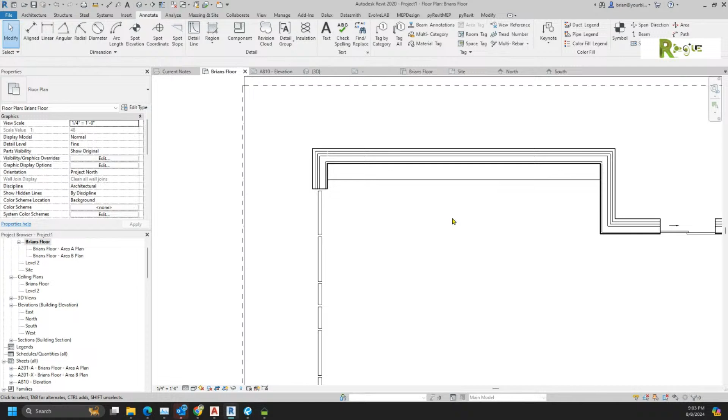Let's say, remember how we were drawing this entrance at the back? Let's say we wanted to take all of that. We could group that where we might name it the entrance, and then that would allow us to copy this group, and we would end up with that same exact group. Remember, you would still have to go back to your split element with the delete inner segment off, and you would still have to clean that back wall, but now you can put some extra entrances on the back of that building. Let's see, tab. We're going to need unpin and delete.

All right. So if we do all that, you can see now your sheets are actually not looking too bad. Obviously, we put that big overhanging canopy, which maybe we just make not near as big. How about if I go to the 3D view, go to this top view, double click, and just pull this guy back in here. Now you're going to find that that elevation sheet probably doesn't look too bad. Still a little bit of an overlap.

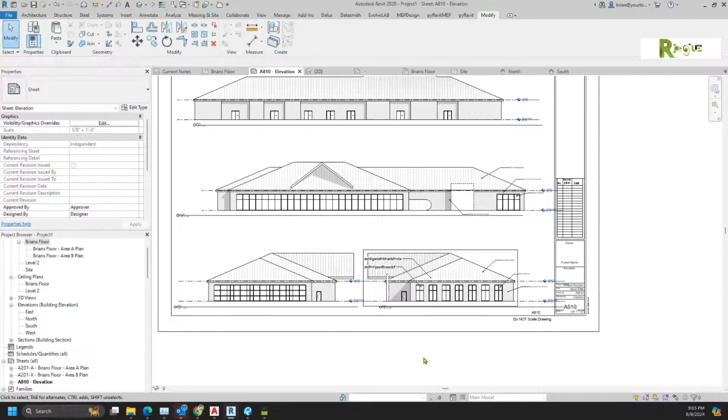But as I said, Ginger, it's really about you being able to put the stuff on the sheet. If you just model it in Revit, that's not getting the project done. Not if you're designing, and not if you're doing BIM coordination. It's got to hit the paper.